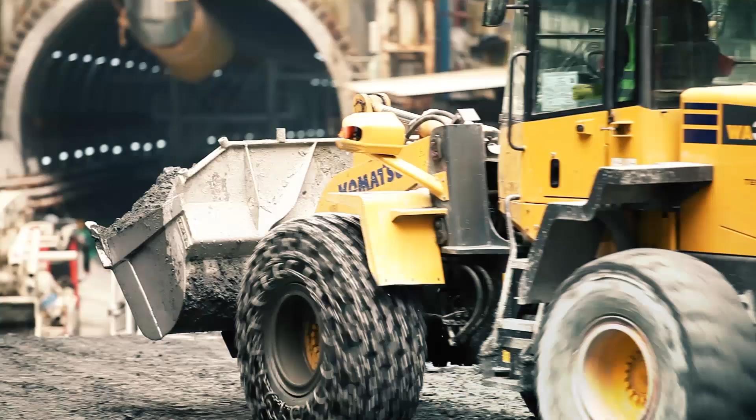Engineers in Istanbul are working on one of the most challenging projects to date. Few people have dared even to imagine a project like this before now. The first tunnel road to connect Asia and Europe beneath the sea. It is 5 kilometers long. It runs from one side of Istanbul to the other, through the very heart of the city.

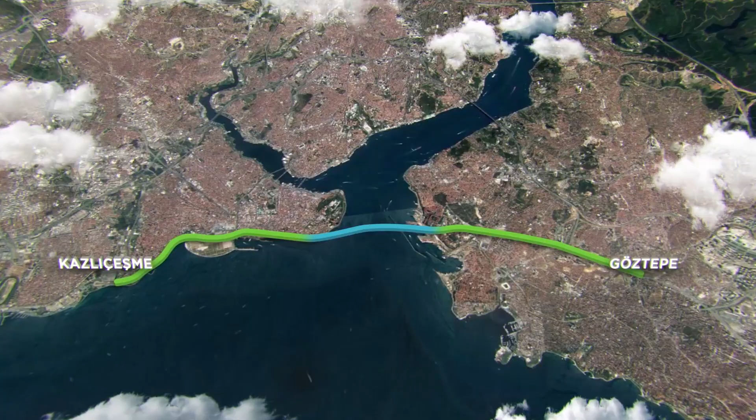It is a much greater accomplishment than it seems at first glance. It requires boring deep into the Earth's crust, formed over millions of years. At its deepest point, it reaches 106.4 meters underground. Extremely high pressure is involved at such depths, which means the boring can only be accomplished with the help of a giant machine. This project used one of the biggest tunnel boring machines in the world.

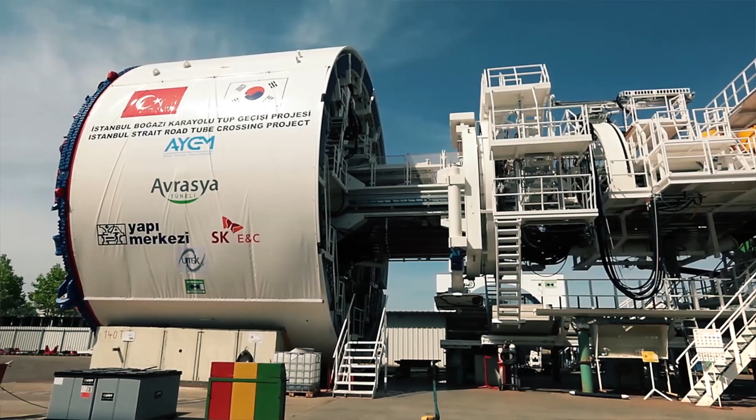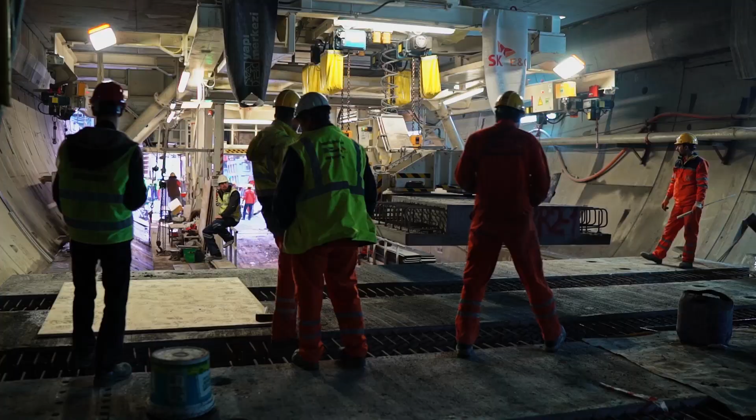It is 120 meters long and weighs 3,300 tons. It bores 24 hours a day, a colossal non-stop metal mole. The project is quite risky and extremely expensive, with a price tag of $1.245 billion US. All of this has a single purpose: to ease Istanbul's chronic traffic problems.

Setting aside everything else, Istanbul's silhouette alone is a universally known trademark. Istanbul is the one and only city that sits on 2 continents. It is not an ordinary city. It is a living organism, active 24 hours a day. Just like vessels, the roads facilitate blood flow to the city. And of course, this megacity of about 15 million people suffers from a diverse array of problems. These are not minor problems.

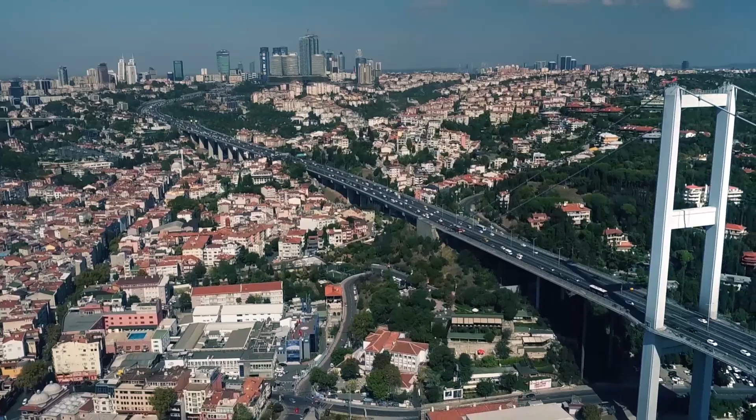Bosphorus, which connects the Marmara Sea with the Black Sea, separates the city into 2 parts along the north-south axis. This extraordinary circumstance creates a peculiar phenomenon: intercontinental trips inside the city limits. One part of the city is in Asia, while the other is in Europe. According to 2016 figures, 31.7 million one-way trips take place daily inside the city of Istanbul. About 10.2 million of these trips are made aboard public transportation vehicles.

Thousands of vehicles cross over from one continent to the other. These facts and figures make Istanbul the 6th busiest city in the world when it comes to traffic. The traffic congestion in Istanbul, which has about 4 million vehicles, costs 6.5 billion Turkish lira annually on average. There is also an additional fact that Istanbul must face.

The bridges on the Bosphorus are not equipped to prevent the congestion caused by intercontinental crossovers. The intensity of traffic on the Bosphorus significantly outstrips the overall capacity of the 2 existing suspension bridges. There are only 2 bridges in this very huge Bosphorus Strait. So in Korea, we have a similar strait, but we have more than 30 bridges in this kind of strait.

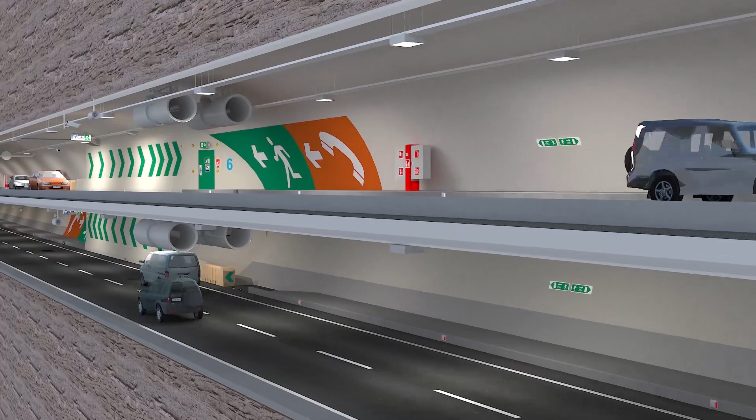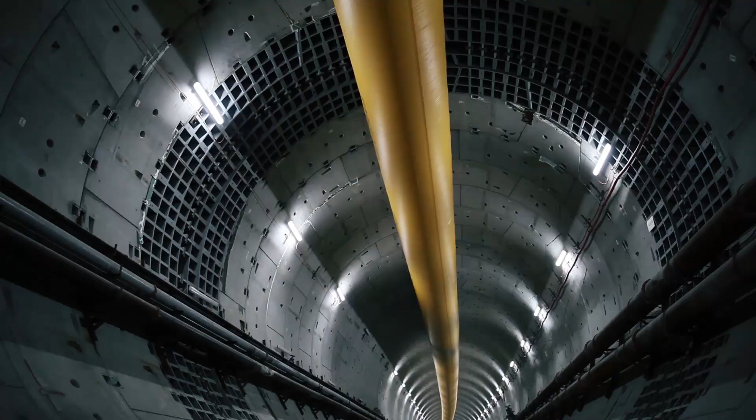The solution lies not above ground, but rather deep underground. This is where the Eurasia Tunnel comes into the picture. The historic project began to improve the traffic in the city. Politicians, bureaucrats, engineers, businessmen, and the public all concur. Excitement is in the air. It is the first time that a tunnel road will connect Asia and Europe. The Eurasia Tunnel is becoming a reality.

The project's size is remarkable. The tunnel ends on the European side at Kumkapı, on the historic peninsula. And on the Asian side, the 5-kilometer-long tunnel comes to the surface at Koşuyolu. The total length of the project is 14.6 kilometers. The tunnel does not follow a straight course underneath the Bosphorus. Rather, it runs along a curved route decided by the geological structure of the seabed at the Bosphorus's bottom.

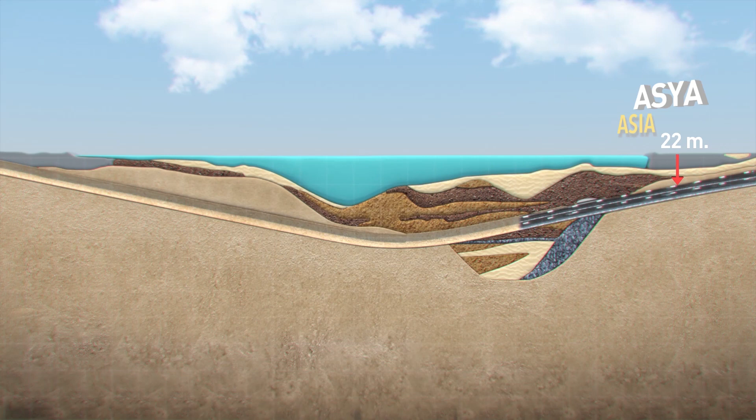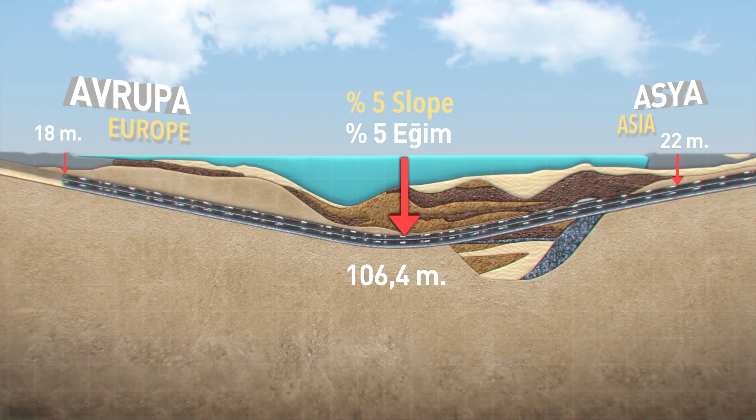The tunnel starts 22 meters below sea level in the Asian continent. It slants down at a 5% slope until it reaches the deepest point. This deepest point lies 106.4 meters below sea level. From this point, it starts back on an upward slant until it reaches 18 meters below sea level on the European continent.

The idea of hundreds of thousands of vehicles crossing to the other side beneath the sea rather than above sea level may sound crazy at first. But such challenging structures are not at all alien to this geography. Many structures have made history in Istanbul. One of these is a temple that turned simplicity into grandiosity. Süleymaniye Mosque. Built by the architect Sinan, the edifice has survived thousands of earthquakes during the last 460 years.

Hagia Sophia, one of the boldest steps ever taken in historic world architecture, served as the world's biggest temple for about a millennium after it was built in 537. Galata Tower also holds an important place in Istanbul's skyline. It is 1,489 years old and on the UNESCO World Heritage tentative list.

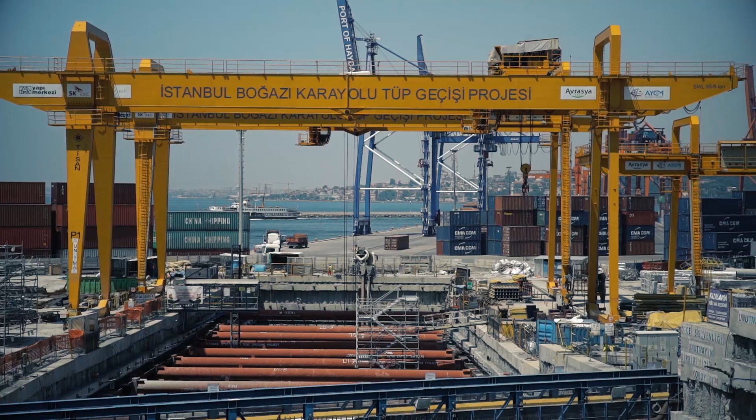It is by no means easy to secure a loan for a project of this magnitude. 11 different international organizations are providing the $960 million in financing. The remaining $285 million has been covered by the two companies carrying out the project, Yapı Merkezi of Turkey and SK Group of South Korea. Başar Arıoğlu, the chairman of Yapı Merkezi Construction, was among the architects of the difficult credit sourcing process.

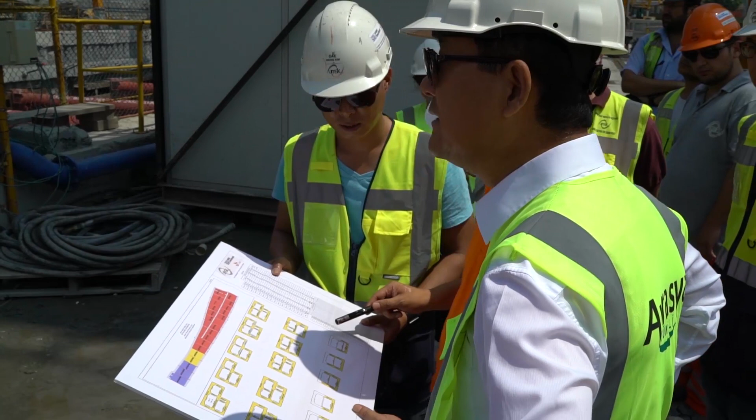Financing crisis was there. Global financing crisis changed the financing rule of game. So that's why we had to invite the more strong financing institution. With its 18-year maturity, the loan has the longest maturity ever extended to a Build-Operate-Transfer (BOT) project in Turkey.

When a project is this big, the number of organizations involved is also inevitably too many. This project is PPP project. We have concession, and we are getting money from the lenders and the shareholders. We are making the tunnel and open it, and making money from the people who are going to use it. It's very simple, but if you work into the further, it's not that simple. There are lots of interest parties, so you have to organize, harmonize each party's interest. So there came a need for a new organization to coordinate the various parties.

ATAŞ, or the Eurasia Tunnel Operation, Construction and Investment Inc., was founded as an equal partnership between Yapı Merkezi and SK E&C. The ATAŞ Deputy General Manager, Mustafa Tanrıverdi, was among those who shouldered the tough assignment of securing the loan.

Kazlıçeşme, the project's starting point on the European side, was a highly complicated leg in terms of the management processes, although it looked like an ordinary road construction job. This is because the construction was very near the sea and located on a coastal road with especially heavy traffic. Necil Engür was the site manager on this tough portion of the project.

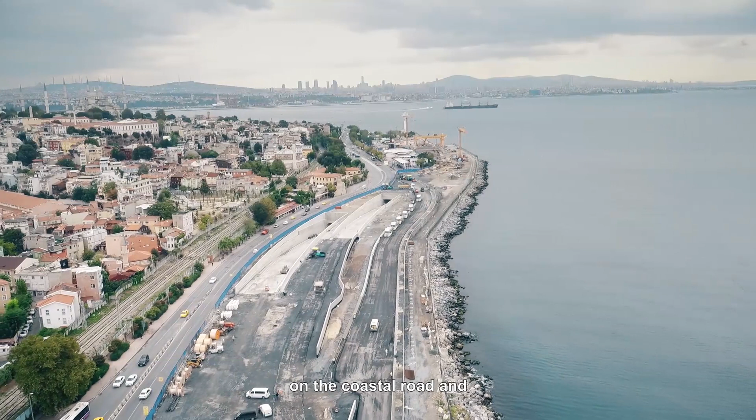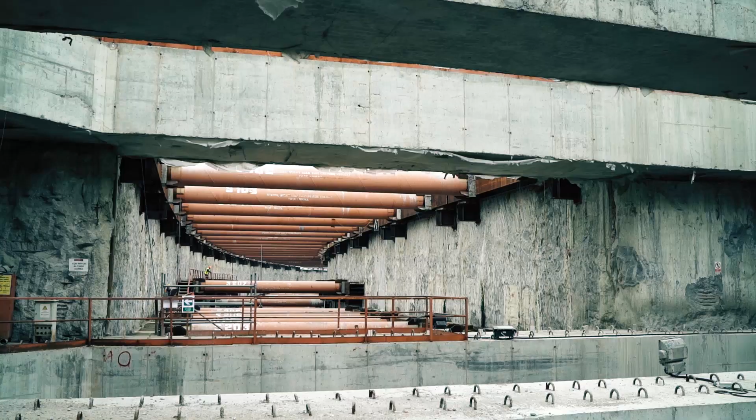All details had to be elaborately calculated. Many technical, environmental, and social elements needed to be taken into account. First of all, a concrete diaphragm wall was built to separate the ground and the sea. Then, excavation work began along the route. Pillars supported the side walls. The tunnel approach road consisted of 8 lanes, 4 going in each direction.

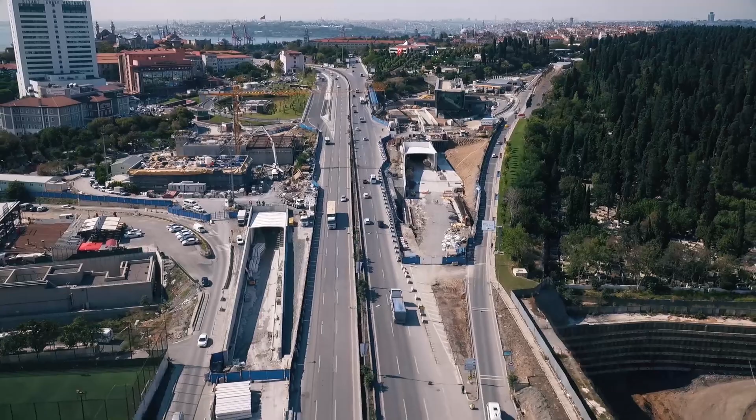The second and the most important part of the project involved the crossing of the strait. This part includes the TBM tunnel and the approach tunnels. The third part extends from the tunnel exit on the Asian side to Göztepe. This route includes intersection work, road extension work, and connection roads, as well as overpasses. Connection roads to the tunnel have 8 lanes, 4 going in each direction. The project's control center is also in this part.

Changing continents during the day is a condition specific to the city of Istanbul. This is not only accomplished by land vehicles or sea vessels. National and international competitions exemplify this. More than 100,000 people from more than 100 countries join the Intercontinental Eurasia Marathon each year. Additionally, over 2,000 swimmers join the Bosphorus Cross-Continental Swimming Race each year. The point of all these events is clear: to witness this unique meeting of these two continents, Asia and Europe.

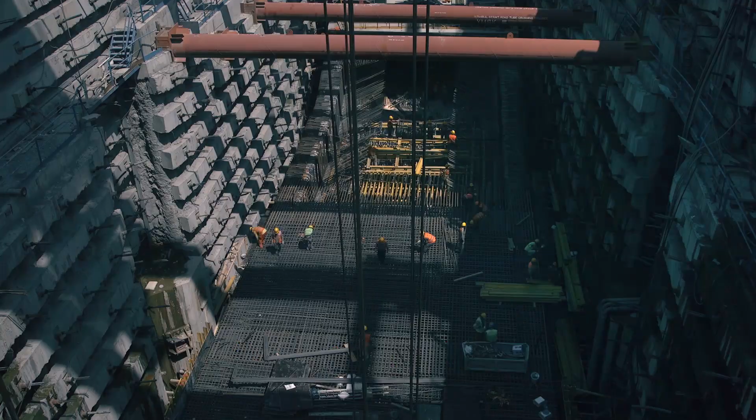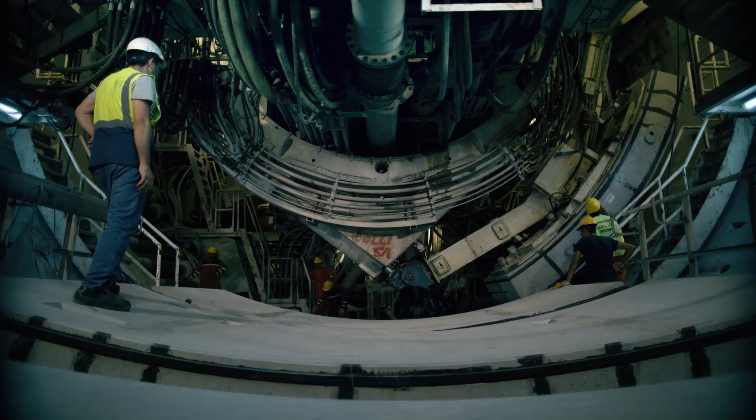The structure of the tunnel is another subject altogether. One option was to open 2 tunnels, 1 for each direction, but this proved costly and risky. The ideal option was adopted in the end, a single tunnel that goes both directions, a masterpiece of a depth and magnitude that has never before been attempted. This project is designed to have a lifetime of 100 years, according to specifications. However, analysis shows that the structure can last much longer.

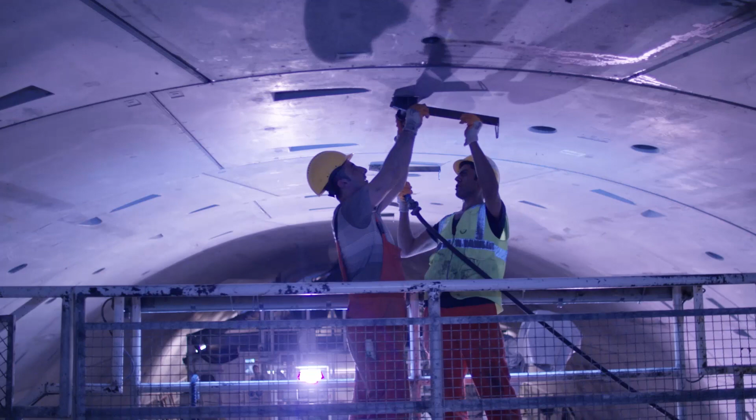One of the obstacles facing this project is time pressure. Every second counts. The construction must be completed on time. Qualified manpower is the most essential aspect. A total of 204 engineers and thousands of workers are employed to ensure the project's on-time completion. This team includes the best engineers, technicians, workers, and machine operators in Turkey and the world.

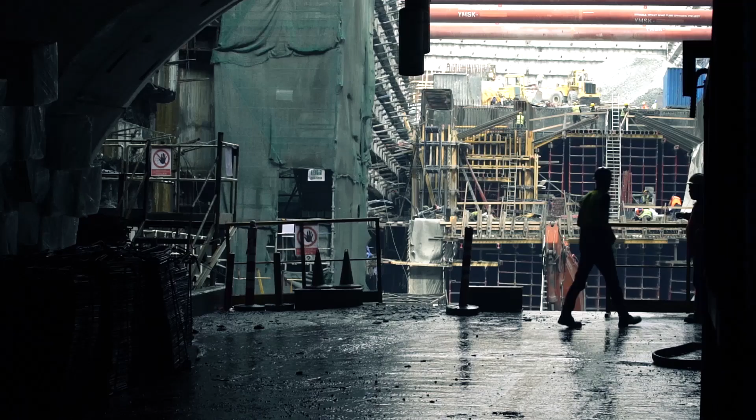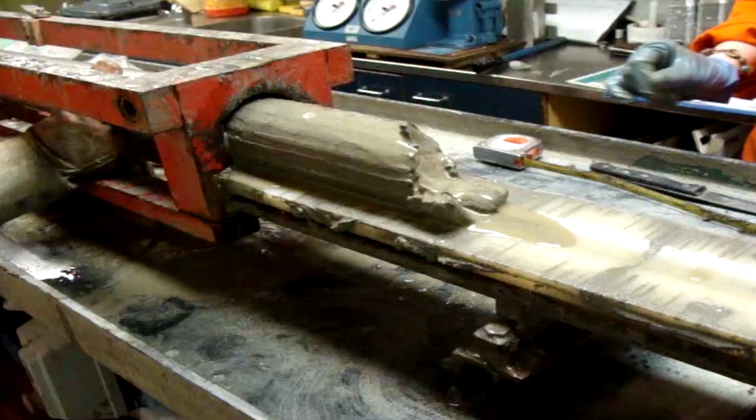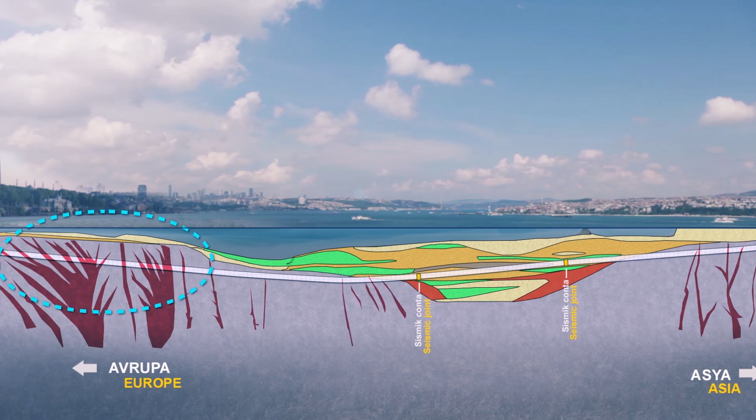There are various geological formations along the route of the tunnel. The geology starts with hard rocks in Asia. Then there are soft layers, such as marine sediments and sand, in the middle. Hard layers consisting of dense volcanic rocks start again on the European side.

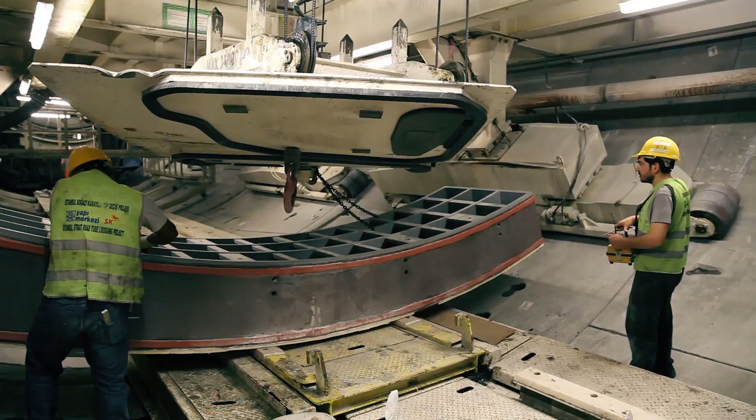Workers' careful, precise effort is essential in such circumstances. The work is so difficult, it tests the physical capacity of the human being. The workers proceed underground during 8-hour shifts. The project ran non-stop on a 24/7 basis. All necessary precautions were put in place to protect from possible risks in the work environment.

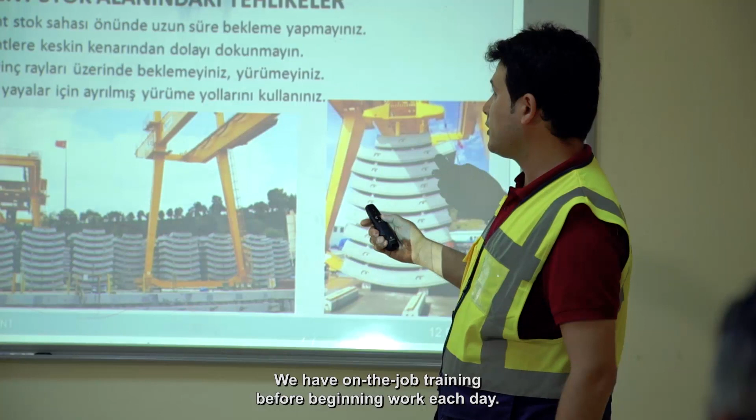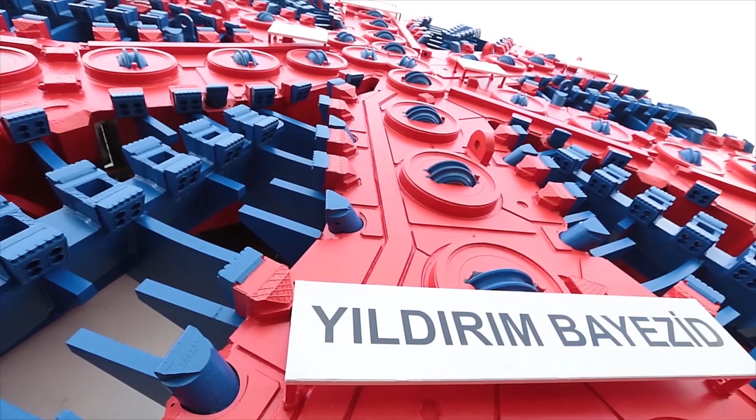Digging a tunnel is a bitter struggle that mankind wages against nature, and achieving victory in such a struggle requires great power. This power comes from the TBM, which stands for Tunnel Boring Machine. It is like a giant mole that runs underground. Finishing the project would have been impossible without it.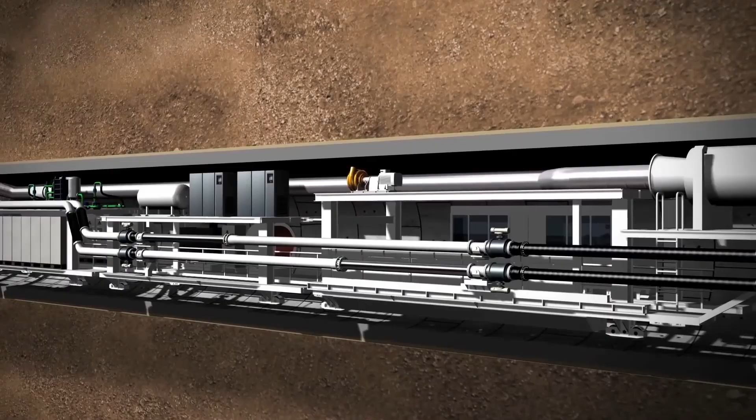It is 120 meters long. It can bore a hole with a diameter of 13.7 meters underground. This is the first time that a machine of this size has ever been used under such extraordinary conditions. Boring a hole with a diameter of 13.7 meters under a pressure of 11 bars. The result has been a great success.

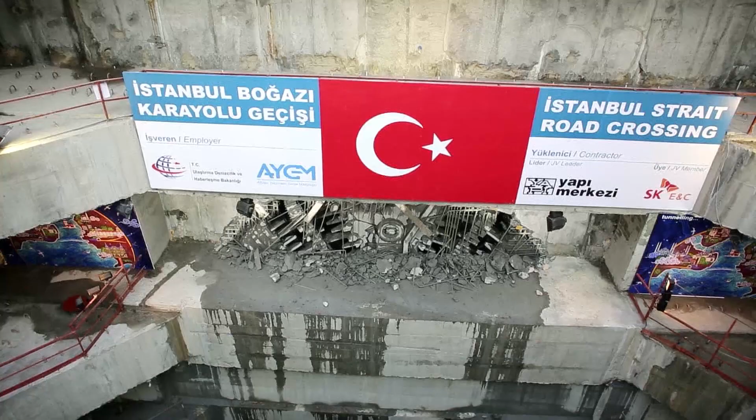The project passed a very crucial milestone when it reached the end of the long digging marathon. It was a historic moment. The TBM, which started digging in Asia, appeared on another continent, and engineers, politicians, bureaucrats, and workers celebrated this as a huge victory.

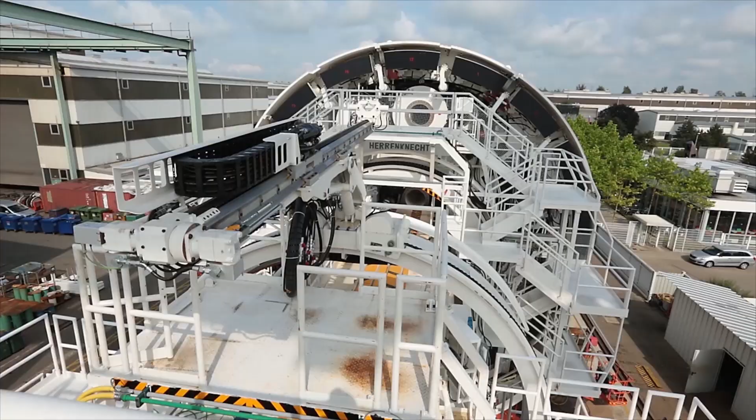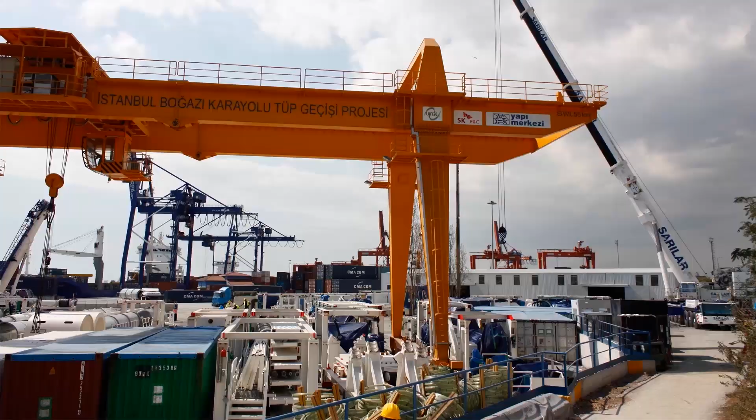The TBM was produced specially for the Eurasia Tunnel by the company Herrenknecht in collaboration with Turkish engineers. It is named Yildirim Bayezid. Produced in Germany, parts of the TBM were loaded on different ships and then sent to Istanbul. Upon arrival in Istanbul, the TBM was reassembled inside the tunnel. This reassembly work alone took about 3 months.

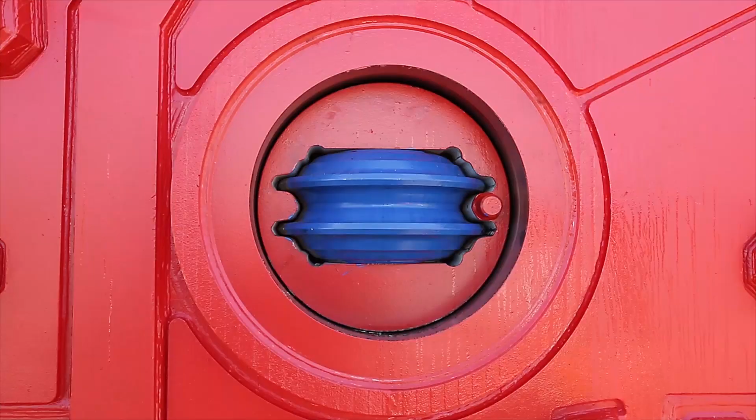One crucial element behind this success is the boring discs designed specifically for the boring area. The TBM has 35 boring discs. Preparing these discs to match the differing geological structures proved essential.

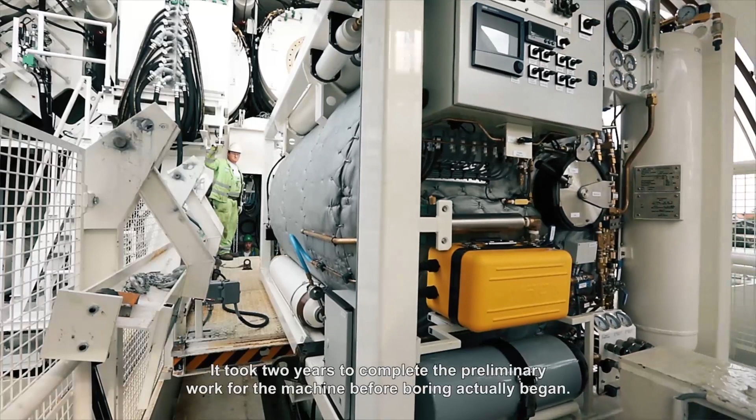The geotechnical report prepared for the route was sent to Herrenknecht, the company that built the TBM. Herrenknecht produced the discs in full compliance with the geology.

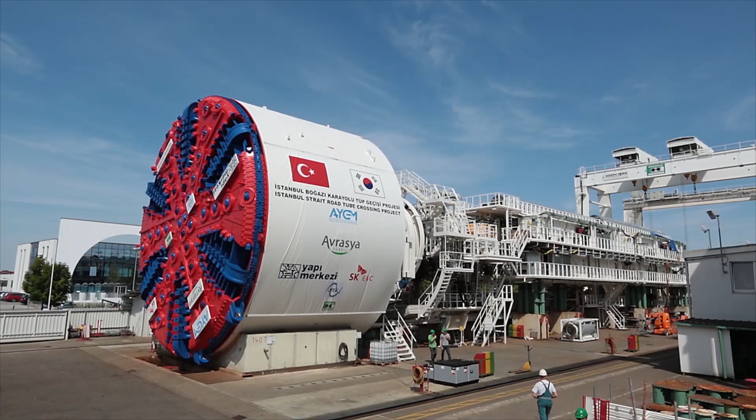The TBM produced for the Eurasia Tunnel is a complex machine made up of thousands of parts. Its cutting head was designed to work on both soft soil and in low to semi-coarse rock formations. The cutting head originally weighed 120 tons, but fell down to 90 tons after being worn away during the tough 476-day boring process.

This tunnel is the Champions League. If you compare it with football, it's absolutely special. And I would say it's a highlight. It's the first time that we entered such a big tunnel with a high pressure and did make a conception like this successfully. This will lift the whole industry and give us a chance to make tunnels which we didn't do before, quite clearly.

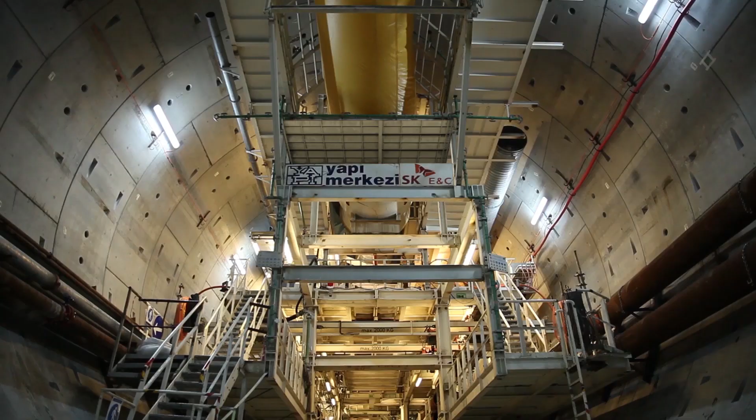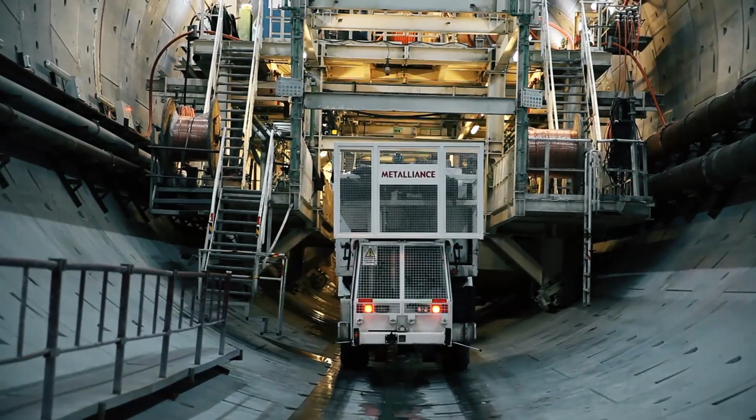The Eurasia Tunnel is the 6th largest tunnel in the world in terms of the width of its diameter. It is in 3rd place in terms of compression strength with its 11-bar pressure. This is the first TBM tunnel boring project realized with a diameter of this size and with such success. To work under such a high pressure, one needs a very special team that includes industrial divers.

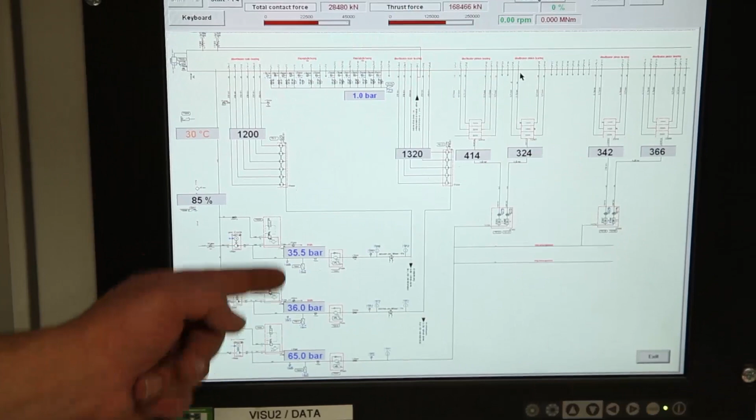Specially trained divers are working under 11-bar pressure for the first time in the world. Their job is to realize, maintain, and repair the TBM. Victor Karl managed this challenging process. Critical works we had to do were repair works on the TBM stone crusher and the grid that are critical. If they don't work, the whole TBM doesn't work.

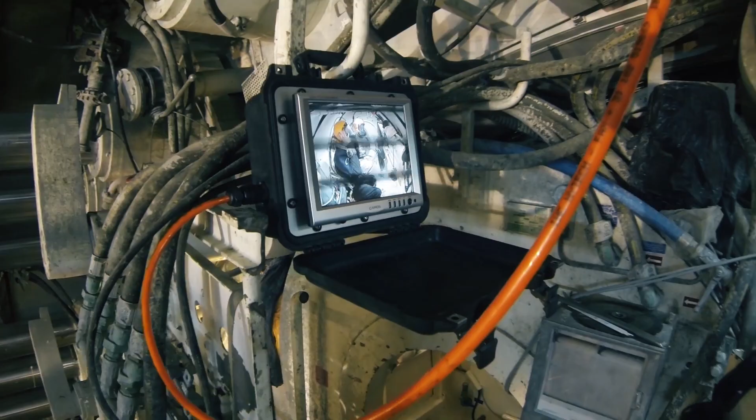The stone crusher crushes the stones coming from the front, and the first intervention or the first problem the TBM had. Working on the TBM's front part under high pressure is a difficult process. It requires special equipment, great concentration, and a good deal of preparation. The divers first needed to equalize the pressure to enter the work environment. They needed to enter a compression chamber for that. They stayed there for 10 days without interruption.

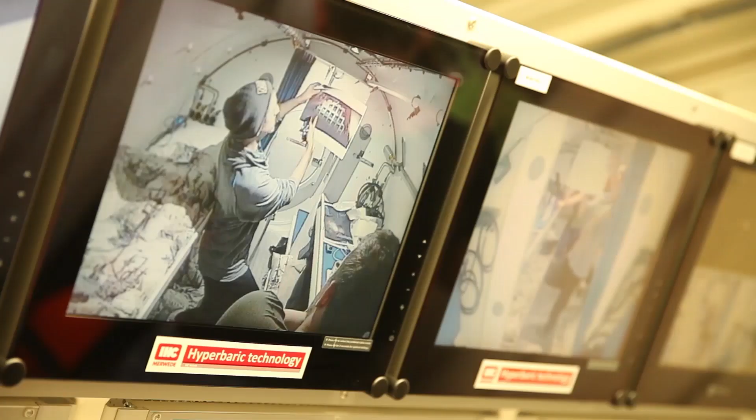They breathed air that was a mixture of oxygen, helium, and nitrogen. The guys were living on 10 bar, equal to 100 meters of water depth. They were living on that depth and working on 10.8 bar. Yeah, so they were maybe like 10 days or something in total. They were under this pressure and then decompressed within 5 days.

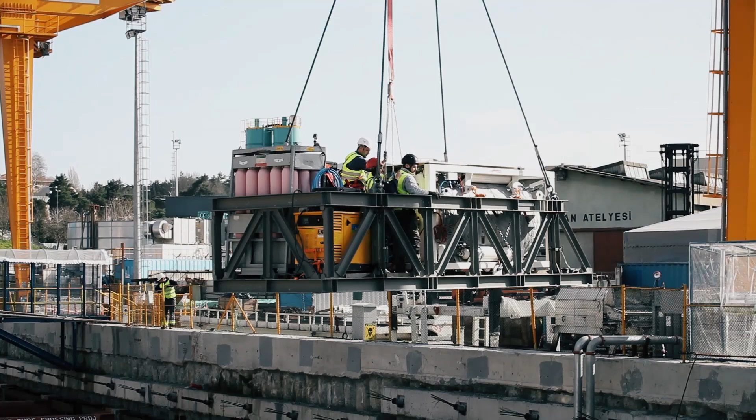Following the pressure equalization, the divers then start moving towards the front section of the TBM. This trip is made inside a pressurized capsule. Then, by using the connection mechanism, they enter the area where they are supposed to carry out maintenance procedures. They can stay there 10 hours at the most. This is because the pressure in front of the TBM is 11 times greater than normal.

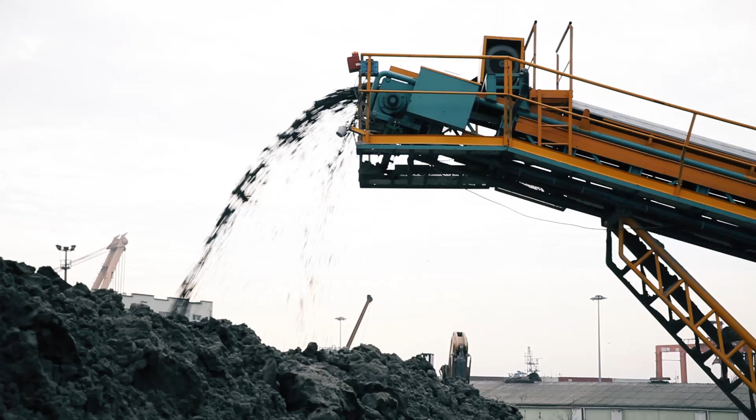There is a need for boring 500,000 cubic meters under the Bosphorus. The TBM puts in place the reinforced concrete segments of the tunnel while the boring process continues. The segments are put inside the TBM in a certain order. The mechanism called erector mounts the segments to create a complete form. The segments are fixed to one another using bolts.

And finally, a key block is added to ensure that the ring stays whole. The block weighs 7 tons. The construction work is completed by injecting concrete into the form. The TBM pushes itself forward by thrusting its hydraulic arms onto the ring. It continues to bore as it moves forward.

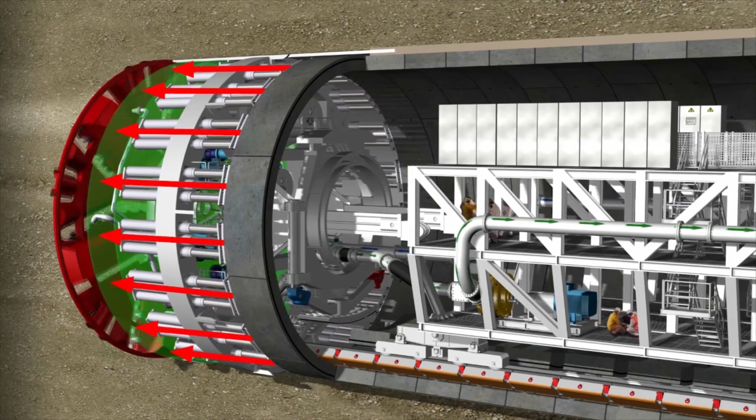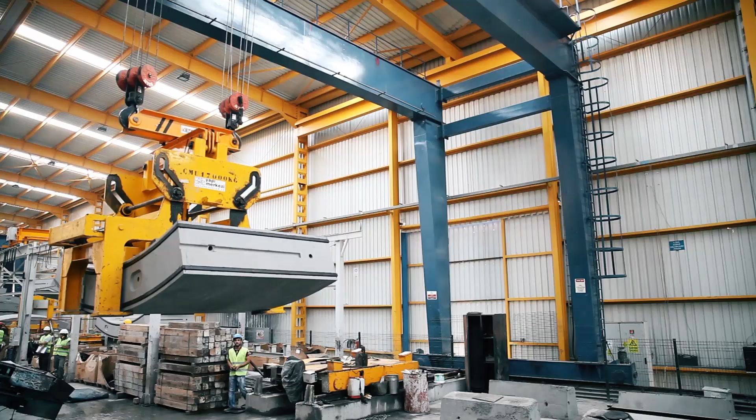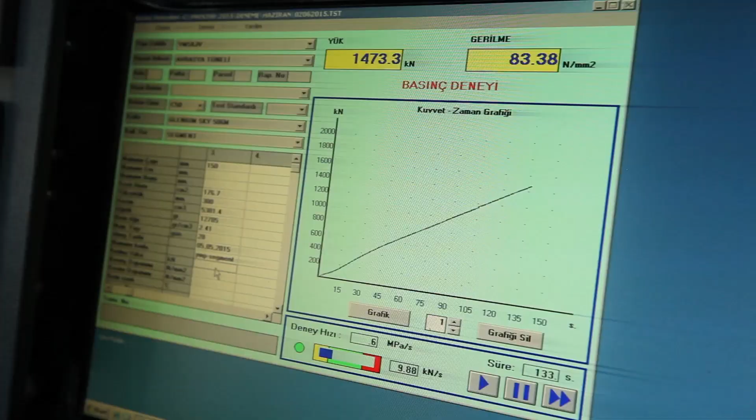Reinforced concrete segments used in such a special tunnel are, of course, special too. The segments that form the outer wall of the undersea tunnel can bear a pressure of 75 megapascal. This means that each square centimeter can bear 750 kilograms. The segments are produced by Yapı Merkezi's prefabrication plant. Each and all of them are completely watertight and weigh 14 tons. A total of 15,057 segments are used in the entire tunnel. It is crucial that the materials used in the tunnel be of the first grade.

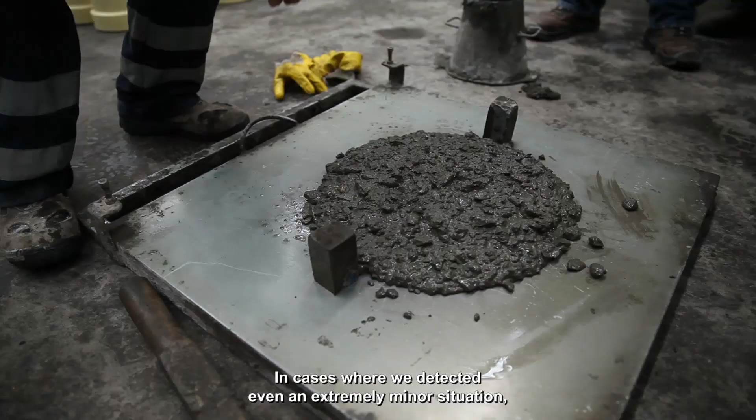All segments must be mounted according to the boring speed of the TBM. They must be delivered to the boring site and loaded onto the TBM for mounting. Otherwise, the boring process may be delayed.

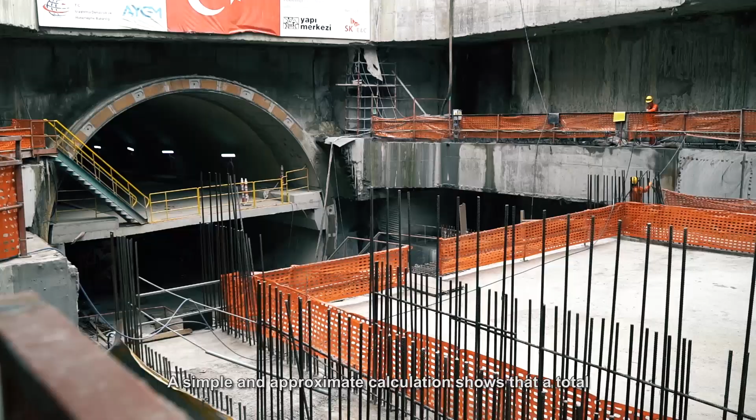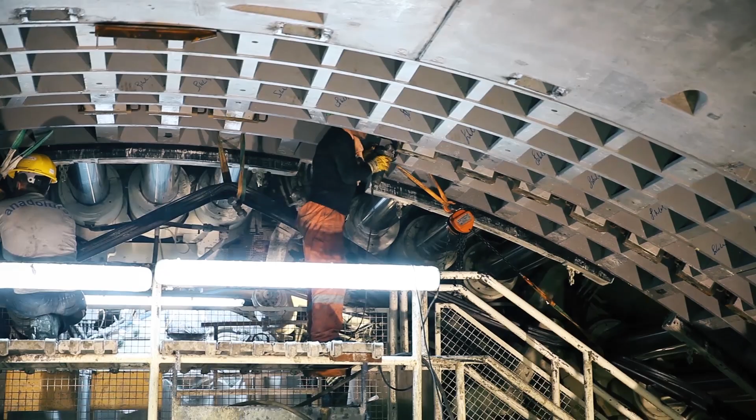The project had to be constructed to endure the toughest conditions. Perhaps the toughest of all these conditions is the potential of earthquake. Many earthquakes have occurred in the Marmara region in the past, and Istanbul is right on the North Anatolian fault line that starts at Van and ends at the Aegean Sea. This project is only 16 kilometers away from the fault line, which has high seismic activity.

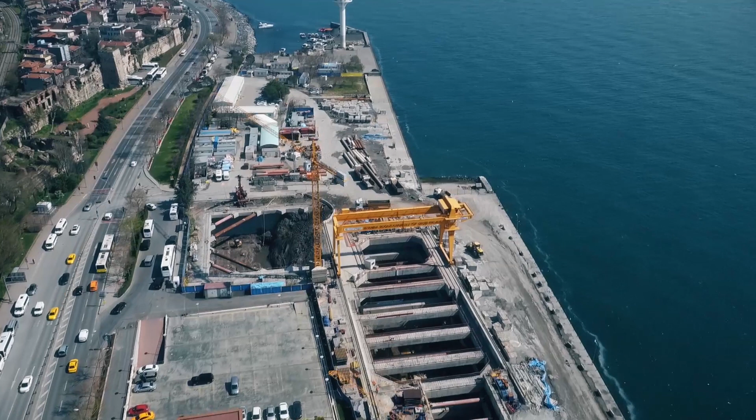Is the Eurasia Tunnel ready to survive such an earthquake? Kandilli Observatory and Earthquake Research Institute took part in the design phase of the tunnel. The project was designed to resist the biggest possible earthquake that may be generated by the fault system.

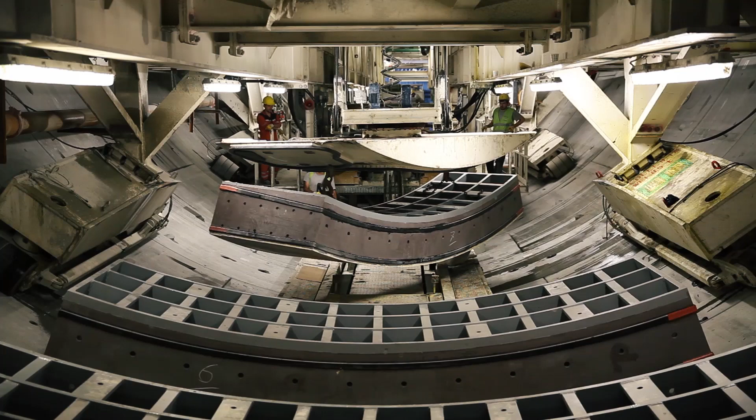The Eurasia Tunnel has got one major guarantee regarding an earthquake, or rather two guarantees. It has two seismic rings that minimize possible displacement. These rings were applied for the first time under 11 bar pressure in the TBM tunnel building process. This further boosted the safety of the tunnel against possible earthquakes.

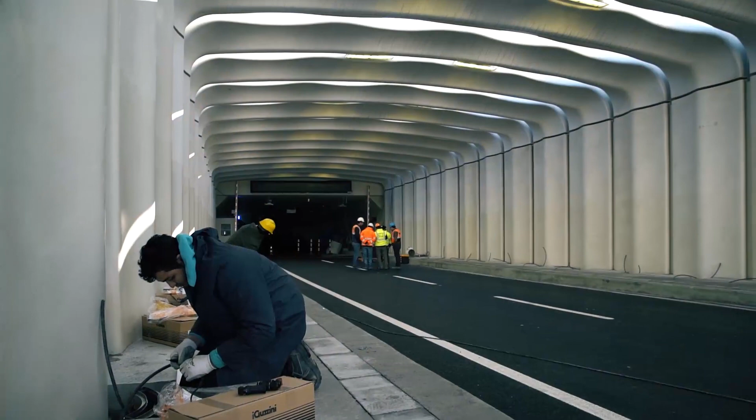The project is advancing further each day. The race against time continues. There is very little time left before the opening. Asphalt works will soon be complete. The installation of the security and signalization systems is complete. Final touches on the architectural elements are also underway. Feverish work continues on the whole of the project.

In addition to the structural characteristics, the project includes inspiring interior features. Good lighting will reduce possible future accidents considerably. Specially designed LED bulbs are used to light the tunnel's interior. Lighting nearest to daylight is used in the entrance and exit of the tunnel. The project's design was inspired by the rosette and passion flower figures the revered architect Sinan used in his work. Yapı Merkezi Holdings Vice President Köksal Anadol chaired the team in charge of the architectural arrangements.

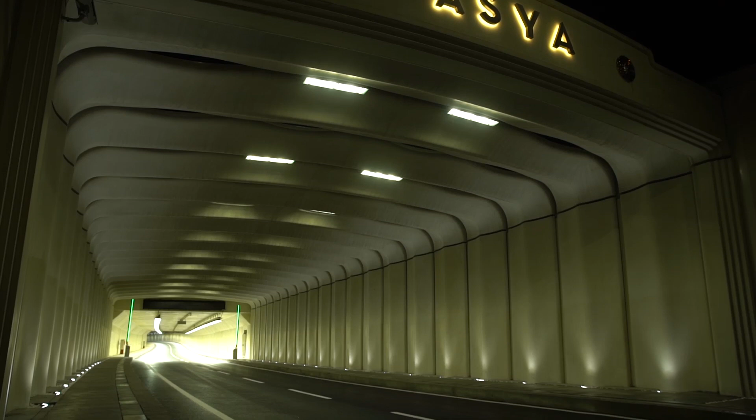The paint and colors applied to the walls were also chosen diligently. Inside the tunnel, their light shows give the impression of advancement and show that one is nearing the exit. The driving route is bright and spacious. In case of an energy loss, alternate systems go into effect to provide uninterrupted power. In case of an electricity loss on the Asian side, power is provided from the European side or vice versa. The generators start working in case of a loss in the whole city.

Ventilation is another crucial element in such a project. Ventilation systems provide fresh air to the tunnel without interruption. A total of 99 jet fans inside the tunnel drive fresh air up to the most remote points. They also take away the poisonous gases in case of intense traffic and fire. There is also a high-capacity drainage system for the emission of wastewater.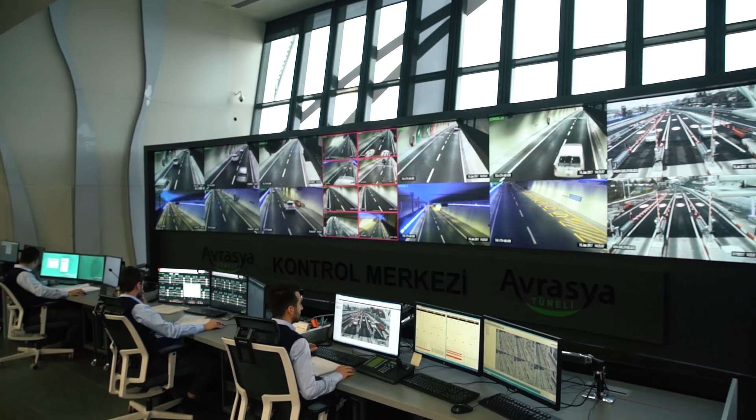Fire is among the most dangerous scenarios that may be encountered in the tunnel. Fire detection and extinguishing systems protect the tunnel. The system continuously monitors the entire vicinity and related buildings. All possible fires are detected instantly with the help of fire cameras.

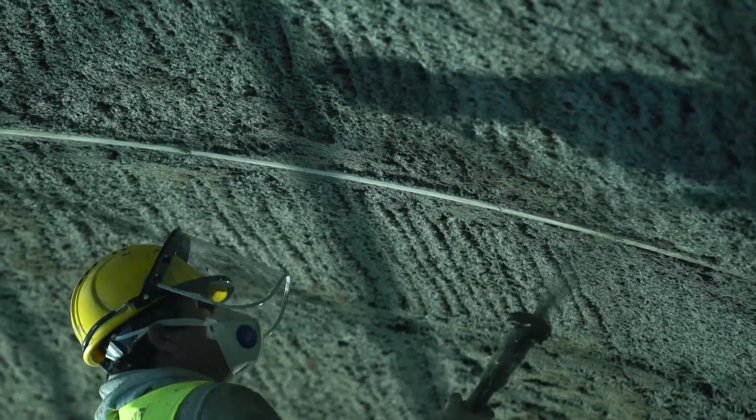All materials used inside the tunnel are also durable against the fire. The walls are coated with fire-resistant surface materials 3 centimeters thick, so a fire that starts in one compartment will not reach another floor. This is the control room of the Eurasia Tunnel. It is essentially the brain of the project. All systems are managed and monitored from this room. The system called SCADA, the Supervisory Control and Data Acquisition System, monitors everything inside the tunnel automatically.

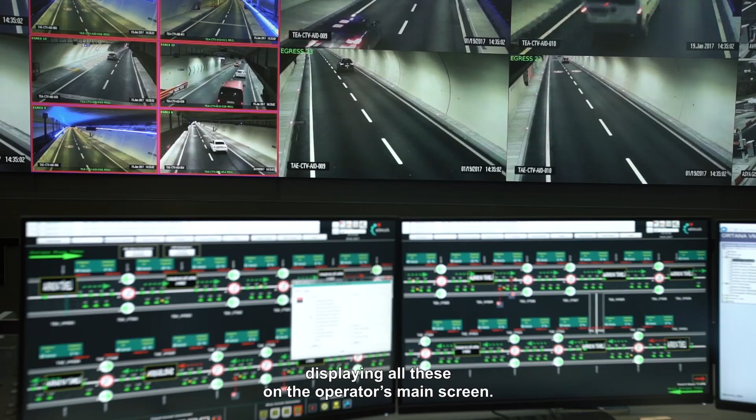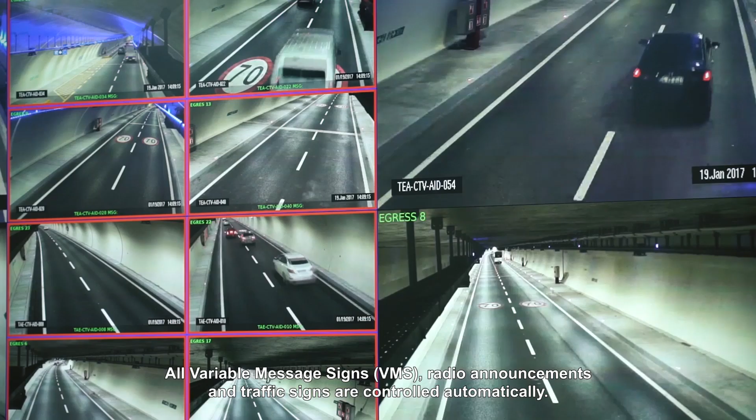The entire tunnel is monitored all 24 hours with the help of 400 cameras. The precautions taken for the various states of emergency are, of course, very important. But what is of prime importance is to ensure the activation of emergency teams. The TEDES system helps detect speeding vehicles.

There are emergency shoulders every 600 meters for vehicles to stop in case of a breakdown. Drivers may reach the control center instantly by using emergency telephones located every 100 meters inside the tunnel. The Istanbul Fire Department, Ambulance Center, Police Department, and the Disaster and Emergency Management Authority are on constant alert for possible emergency calls from the tunnel.

December 20, 2016 will be remembered as a special and proud day in the history of Istanbul and the world. This is the day the Eurasia Tunnel, one of the world's biggest engineering feats, was inaugurated. People followed the inauguration ceremony with great interest.

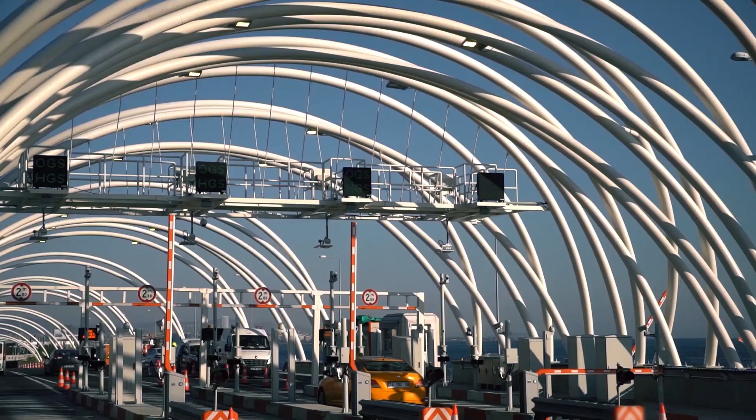The project reduces the more than 100-minute-long transportation time between the two continents to 15 minutes. The Eurasia Tunnel promises functional, fast and comfortable transportation within Istanbul. It promises to bring relief to the traffic congestion. Traffic and transportation specialist Professor Gökmen Ergün thinks the same.

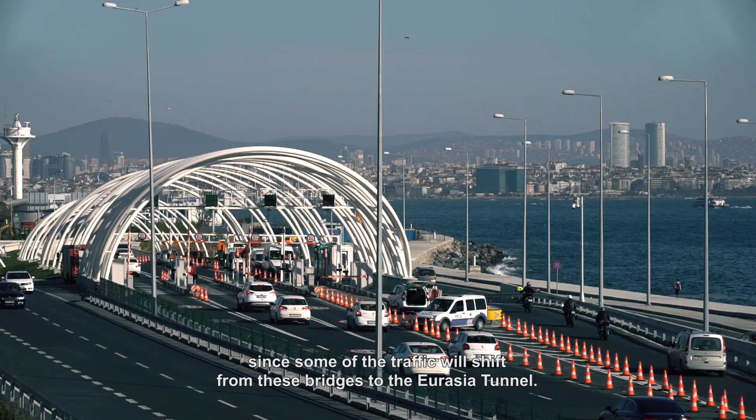The vehicles in the south of Istanbul will be able to cross to the other side without being obliged to go to the bridges in the north of the city. It is expected that a daily average of 100,000 vehicles will use the tunnel on both sides.

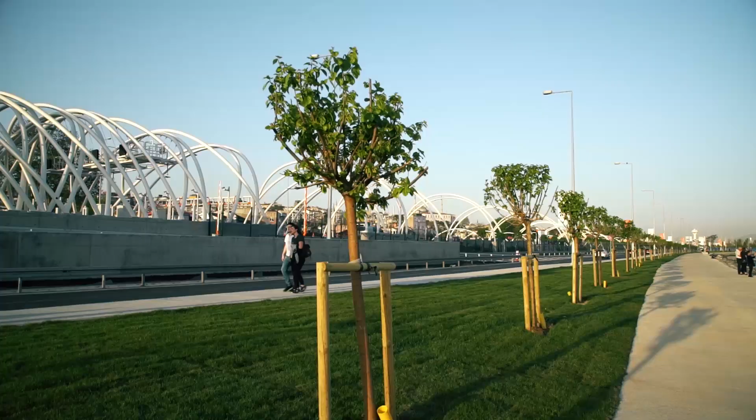The project's design takes into account ecologic balances. Green areas established at air outlets reduce greenhouse gas emissions on the Asian side. The number of new trees in the city increased by 400%, as thousands of new trees were planted along the route. In addition to the 100,000 square meters of green area, a 15-kilometer-long walking trail and cycle track was also created in the region.

As well as that, one of the key features has been to make sure that it is environmentally sustainable, that it minimizes the impact on the local community, and produces an environmentally sustainable and socially responsible project. ATAŞ will operate the tunnel for 25 years. It will be transferred to the Ministry of Transportation without charge at the end of this period.

Many international awards given to the project include Project of the Year Award by ITA, one of the world's most prestigious financial and tunnel building awards, the Best Environmental and Social Practice Award by the European Bank for Reconstruction and Development, and the Best Global Tunnel Project Award by ENR.

We were really pleased to put forward Eurasia as an example of good practice, particularly in what it's done in relation to stakeholder engagement, its promotion of health and safety, its promotion of environmental pollution protection measures, and more recently its work on cultural heritage. It will provide a certain confidence to the civil engineers about a similar or a little more challenging project.

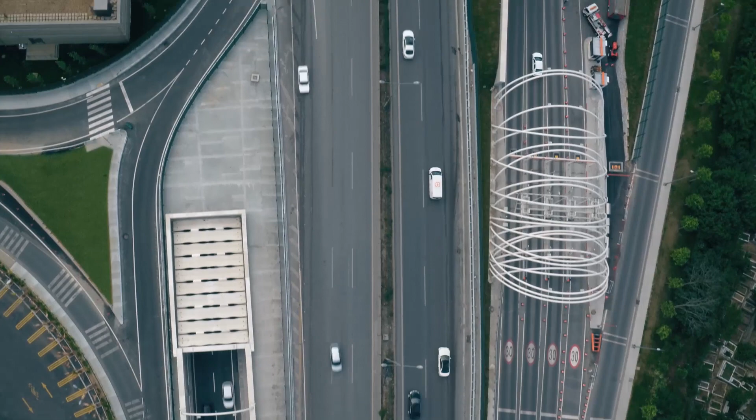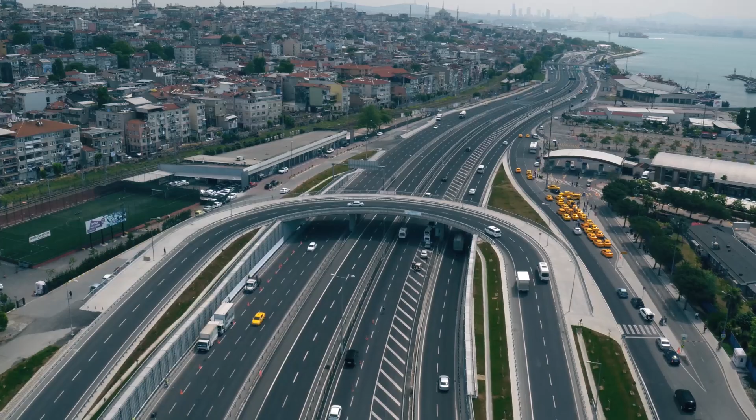The project has brought Istanbul a monumental structure that will inspire future generations. The adventure of Istanbul, already ongoing for the thousands of years during which the city served as the capital of 3 world empires, continues. The Eurasia Tunnel will be among the major milestones of this long adventure.